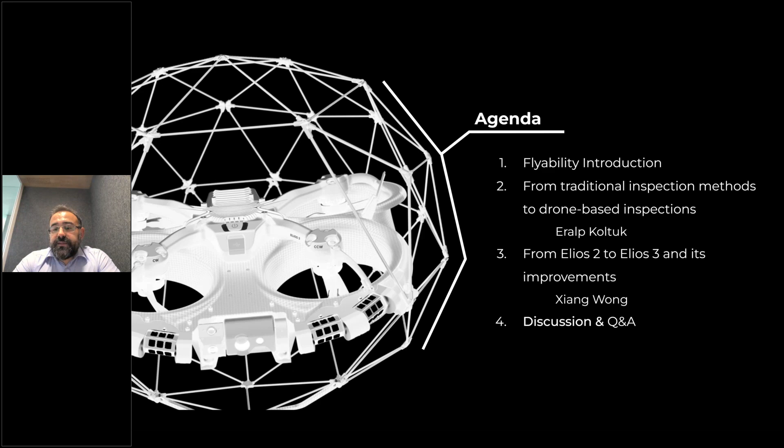So let's get started with a short introduction about Flyability. I see some familiar names here in the attendees list, so I won't delve too much into this, but this is our motto. This has been our mission since the company's establishment almost 10 years ago: no more humans doing dangerous jobs. This has really been the polar star guiding our mission and the development of our product. We have a vision of making confined space entry redundant, and really avoiding as much as possible unnecessary danger when it comes to dangerous industrial areas. We've been quite successful in that endeavor.

Here you really see the development of our products throughout time. In 2016, we launched the very first UAV solution for confined space inspections. Elios 1 was a fantastic rugged machine that has really been through thick and thin and has helped cement Flyability's reputation in the market as the go-to solution for UAV in confined space inspections. And then in 2019, Elios 2 came along, and that was a game changer in terms of ease of use and ability to operate in very complicated spaces, even for people without a lot of UAV experience.

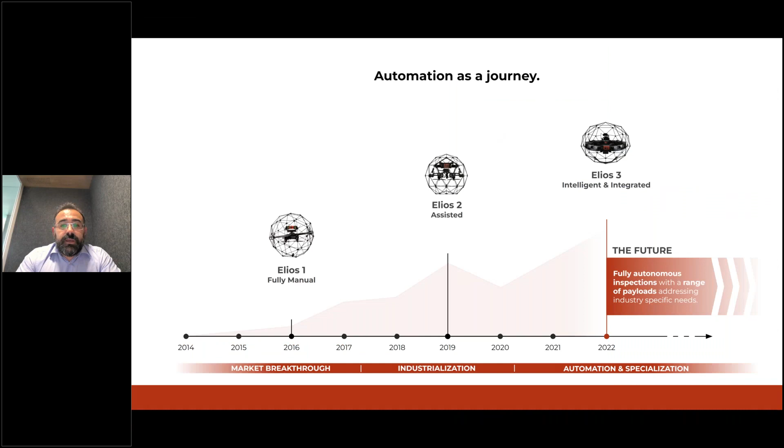And then we changed the game again with the Elios 3, which was launched last year and really became a bestseller in a matter of very few months, and has helped consolidate our reputation in the area as the best drone solution for confined spaces. It has really led to a plethora of discussions around the possibilities of integration with other payloads and the development of the drone itself in terms of autonomous capability. Perhaps this is something we'll be able to cover in the Q&A. I'm sure there will be several questions about that.

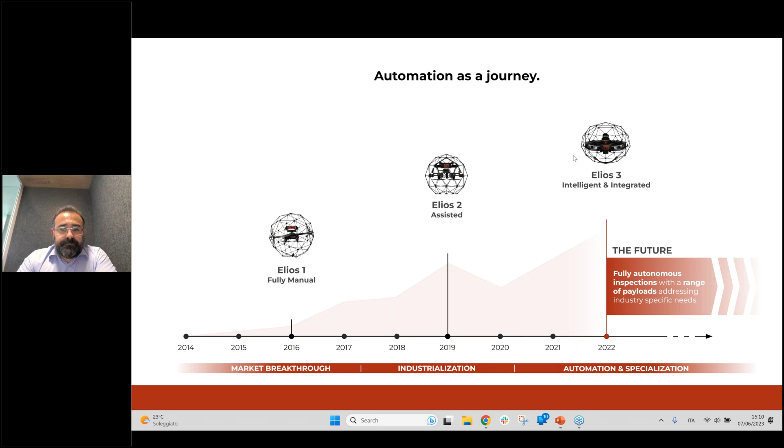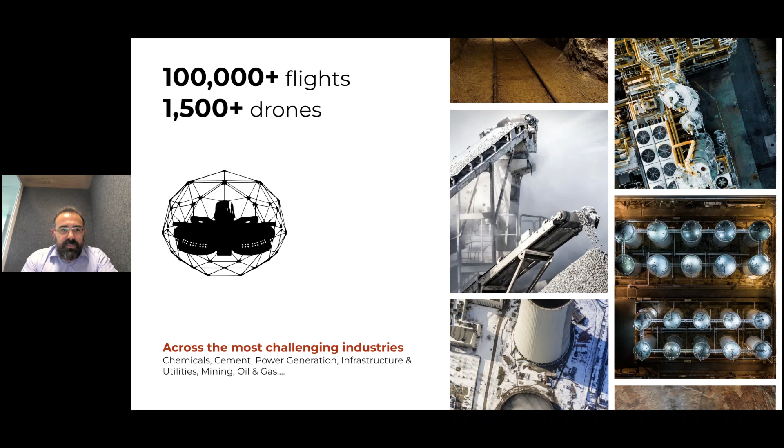This is a very quick overview of some of the most high-profile companies that we've had the pleasure and opportunity of working with during the years. Two in particular deserve a particular mention: Dow Chemical and Cargill. They both made the transition from clients to actually investors. They were so involved in and convinced by the goodness of the approach and benefits of Flyability, and respectively the Elios 2 and Elios 3, that they decided to partake in the Series B and Series C of fundraising for Flyability. So that again goes to prove our track record and our ability to deliver at scale in very large industrial organizations across multiple sectors.

And throughout our products, the three pillars in terms of value propositions - something our illustrious speakers will present to us today - have really been built across these three core elements: improving safety, reducing downtimes, and lowering cost. We'll take a look at how, through different perspectives of asset owners and inspection companies, the calculations of ROI regarding these criteria can change, but at the core they remain the key value proposition that Flyability offers through its solutions.

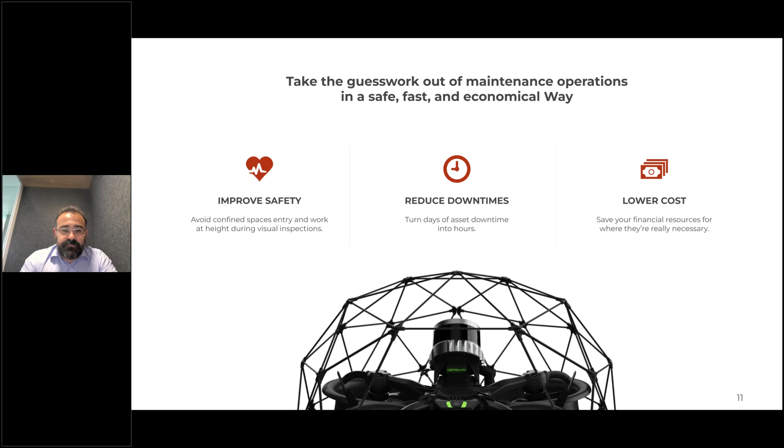Elios 3 is our latest solution. It was launched approximately a year ago - a revolutionary approach to confined space inspections. For those of you not familiar with Flyability products, the key characteristic is that we go where no drone has been before, made possible by a number of technical and high-engineering solutions, including LiDAR and a series of sensors that make it capable of flying even in areas where no GPS signal is reachable. This gives us the opportunity to explore and digitalize areas and perform close visual inspections on assets that would otherwise require very dangerous, costly, and time-consuming infrastructure like rope access or scaffolding.

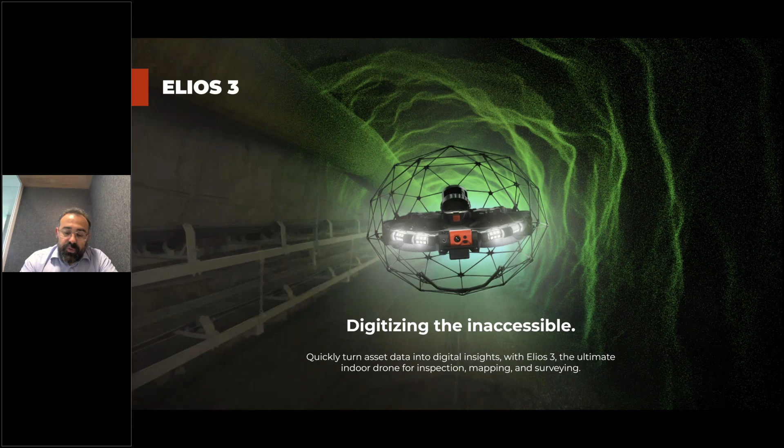Without further ado, it is my pleasure to introduce Eralp. Eralp, good afternoon, thank you for being with us today. Eralp, as I mentioned, is Inspection Chief Engineer at Tupras, one of the largest oil and gas manufacturers in Turkey, and also one of our longest-standing Flyability clients. Eralp is going to talk to us about the transition that Tupras as a company has made, going from traditional means of inspection like scaffolding and rope access to introducing solutions like the Elios 2 and Elios 3. Eralp, thank you very much for your time, and the floor is yours.

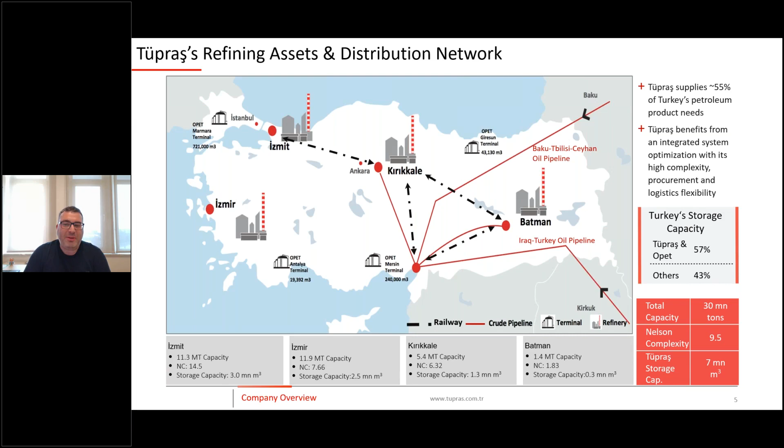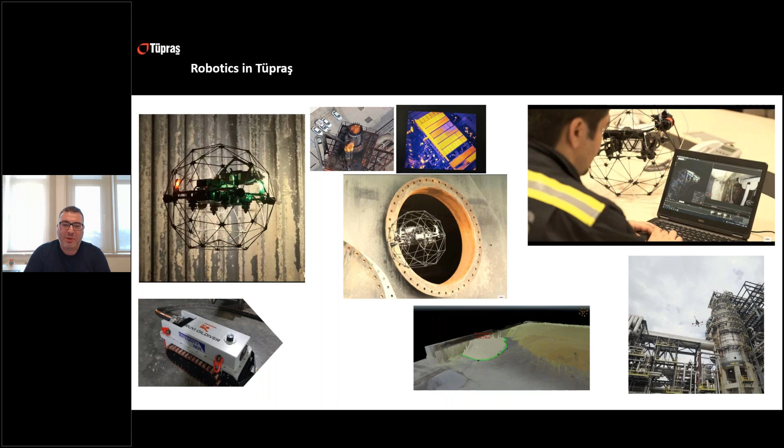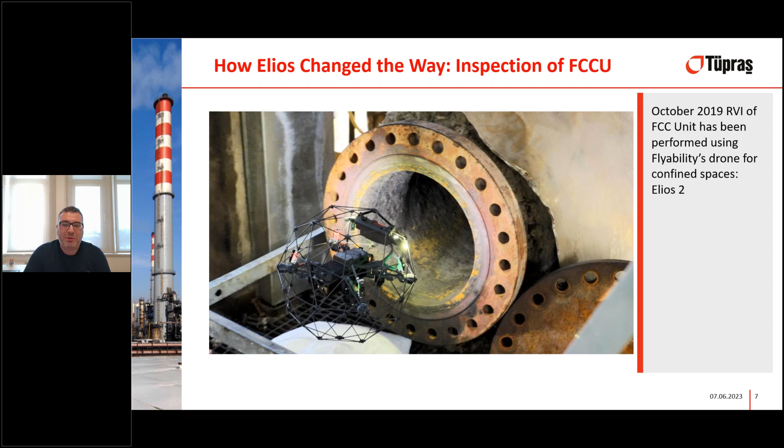So I want to start by discussing how Elios has changed the way we perform inspections. In 2019, during our planned turnaround of the FCC unit, we needed to inspect the riser section. You can see the riser section on the left, highlighted in yellow. It's a 50-meter long pipe where heavy hydrocarbons from crude oil are broken or cracked into smaller hydrocarbons. We wanted to inspect the section, including the cyclones on top, which is a very challenging task.

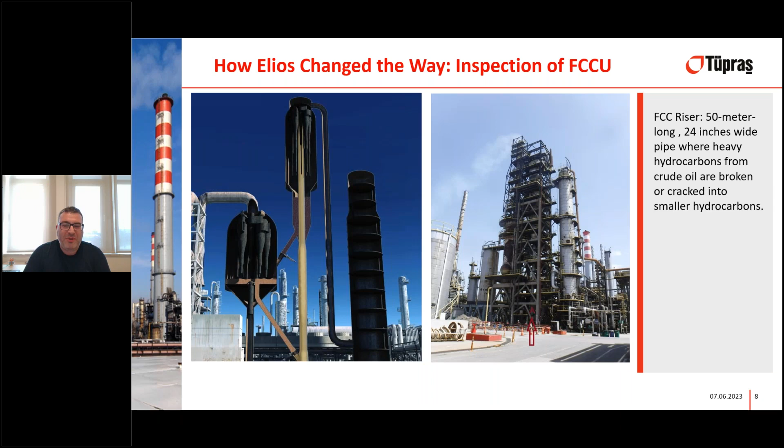Previously, this is how we used to do it. First, you needed to cut the cap of the riser section, which is 24 inches in size. Then you had to lower someone inside to perform inspections, taking many precautions to minimize risks. You can see someone with white protective clothing in this photo. Qualified rope access personnel were needed for this task, equipped with a camera and a flashlight. We mostly relied on a set of photos and verbal comments.

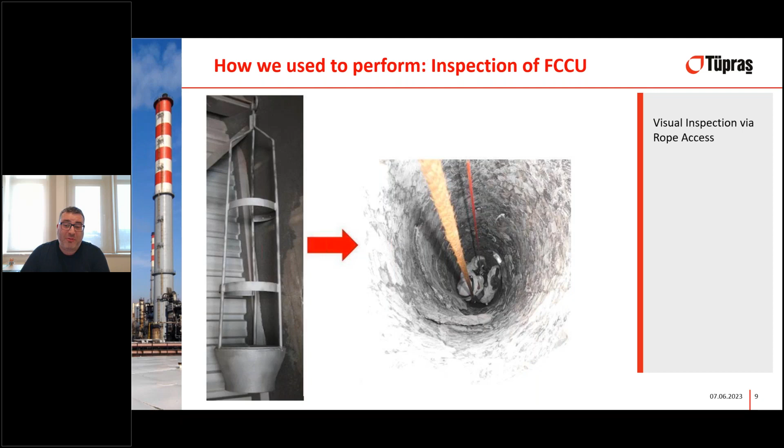Once the inspection was completed, the riser cap needed to be rewelded. As I mentioned before, it was 24 inches in size and made of 5 chrome materials, so it required post-weld heat treatment as well. If everything went well, this sequence would take no less than 2.5 days, equivalent to 170 human hours of work.

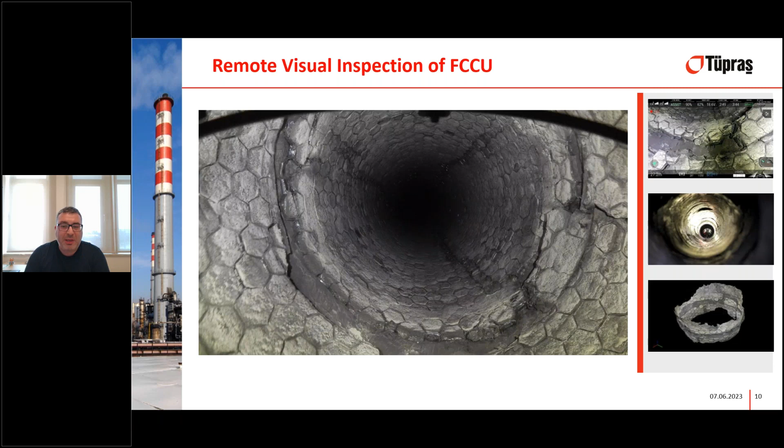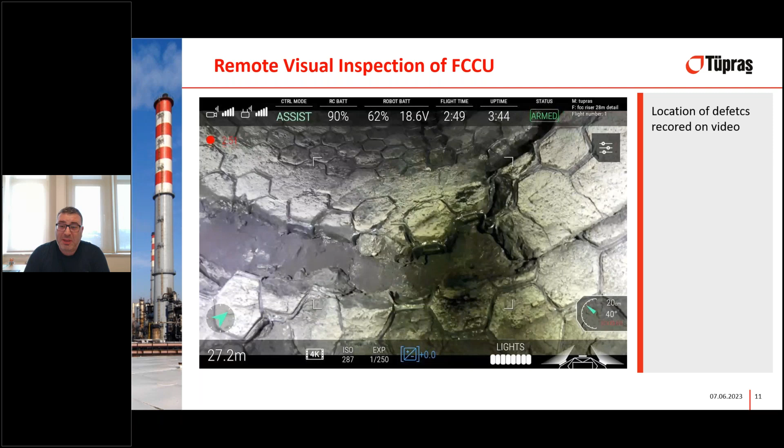Instead, we entered from the bottom flange and completed the visual inspection in several hours, including the cyclones and overhead vapor lines. The location of defects was recorded on video, allowing for detailed inspections of specific points. This gave us the opportunity to perform repeatable and comparable inspections.

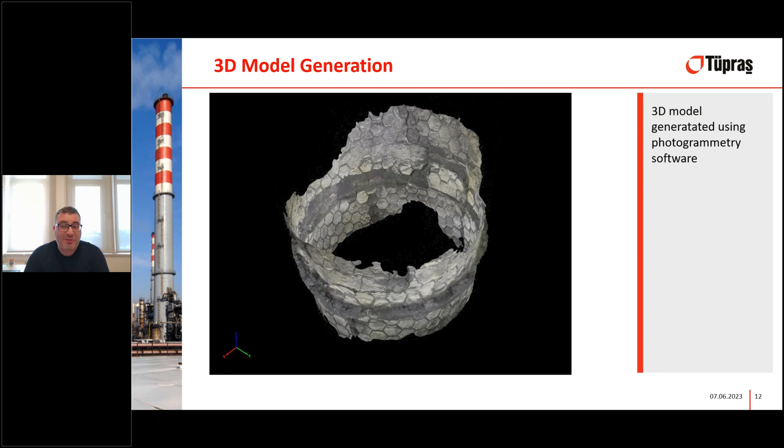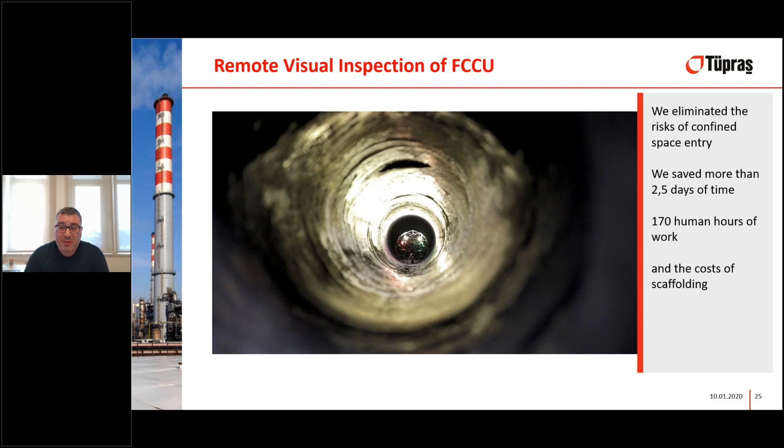Furthermore, it was possible to generate a 3D model using photogrammetry software, providing a 3-dimensional insight for further evaluation. The FCC riser inspection using the Elios drone was a success. We eliminated the risks associated with confined space inspections by not sending anyone inside. Additionally, we saved human hours and the costs of scaffolding.

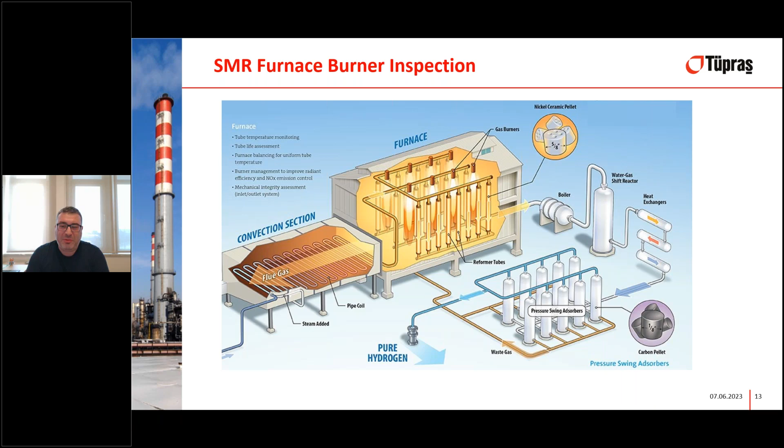Another example is the burner inspection of the reformer furnace. This is a generic illustration. As you can see, the burners are top mounted. The only way to access these burners was to install scaffolding, requiring over 1,000 cubic meters of scaffolding to be installed and removed. However, we completed this inspection in half a day. The quality of the images is very high, and the amount of detail we can see is more than satisfactory. It was another good example of a successful remote visual inspection.

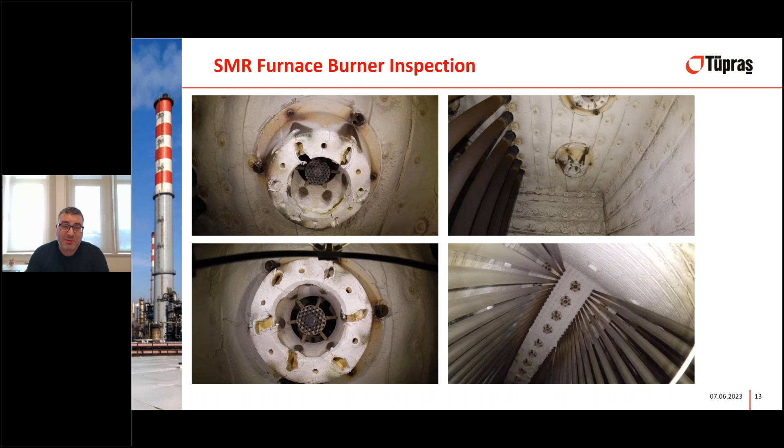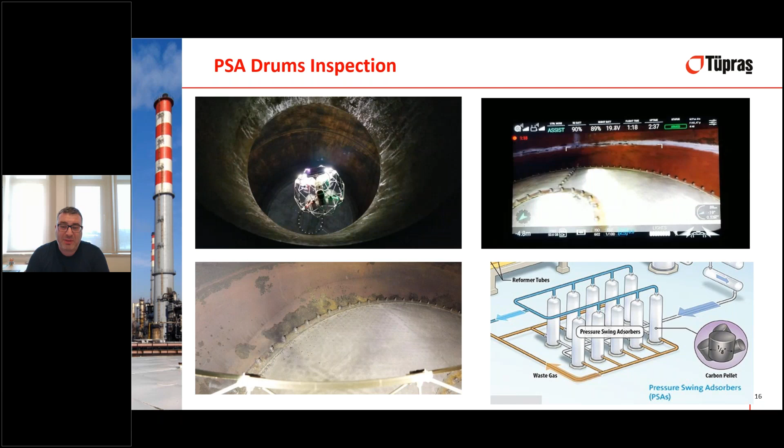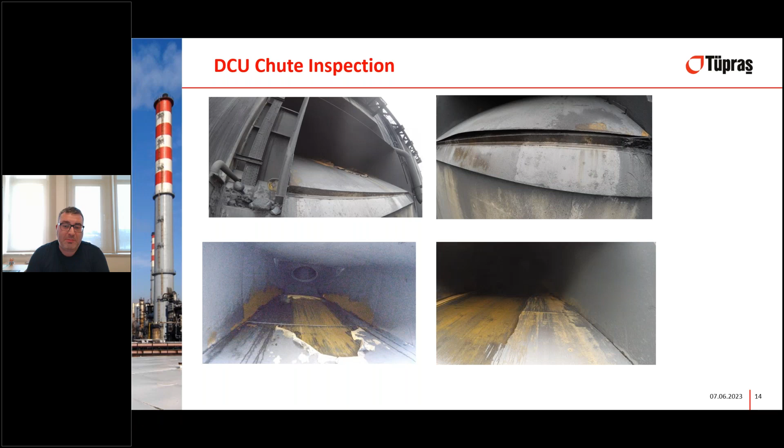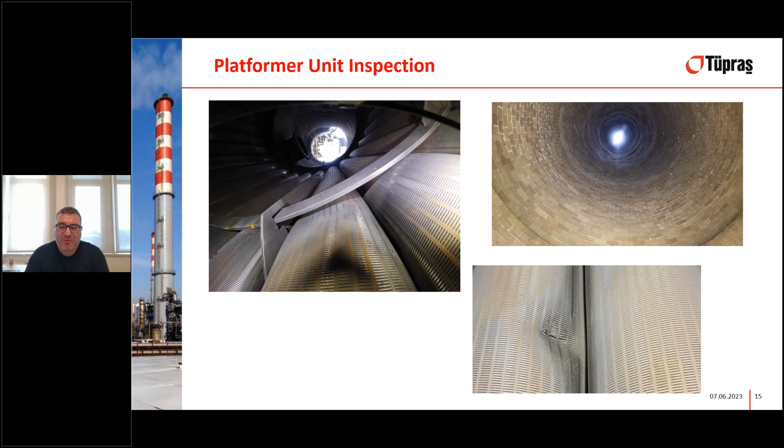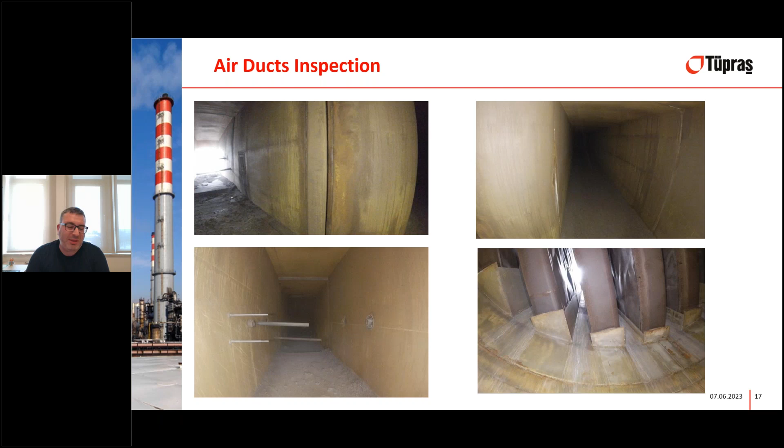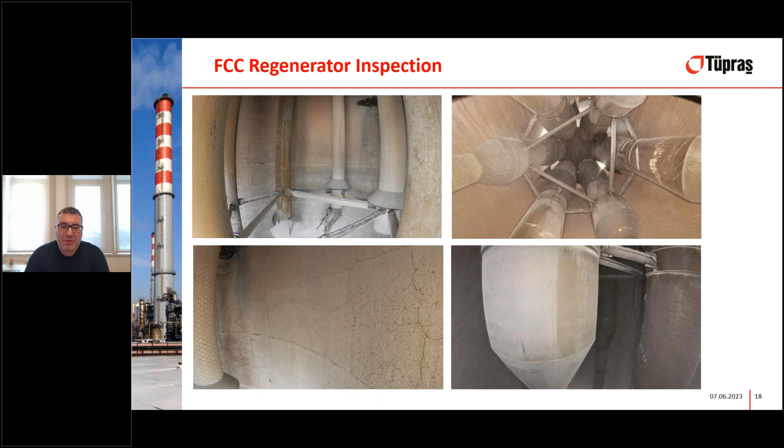So when it comes to air ducts, we normally use rope access professionals to perform inspections. However, it's quite easy with the Elios. This is the FCC regenerator, which is very dusty due to powdered catalyst. We don't need to install any scaffolding to perform this inspection.

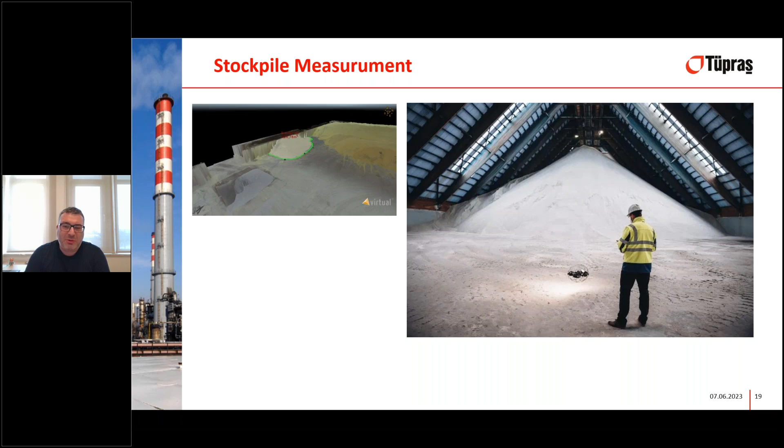And stockpile measurement, it's a new feature that is yet to be tested in Tupras. All stockpiles are normally open air, except one big deep depot where we store coke. We are considering testing this feature soon.

So I also want to mention the Flyability Inspector software, which is quite useful for generating inspection reports and recording information for certain points of interest. That is all from me. I hope I could give you an insight into how we benefit from Elios in our inspection works. Thanks for listening.

Well, indeed, that was incredibly informative. Thank you so much. I think it's quite difficult to have such a wide range of assets presented in such a succinct way. I guess perhaps one of the most important questions that I would have for you, and I take this opportunity to invite the audience to start asking questions. The panel is available on your right, so feel free to start asking questions. We'll go through them as we go along.

I guess one of the key questions I have for you as an asset owner is, what were the biggest challenges for you as an inspector? Because you don't start as a digitalization expert or an industry 4.0 expert. What were the challenges for you as an engineer, as an inspector, to convince your management to adopt this new method of doing things? As you all know, the oil and gas sector is the most conservative sector in the world, so they all want you to prove the concept before they let you go. So it was 2019 when I connected with Mark, and I want to thank him.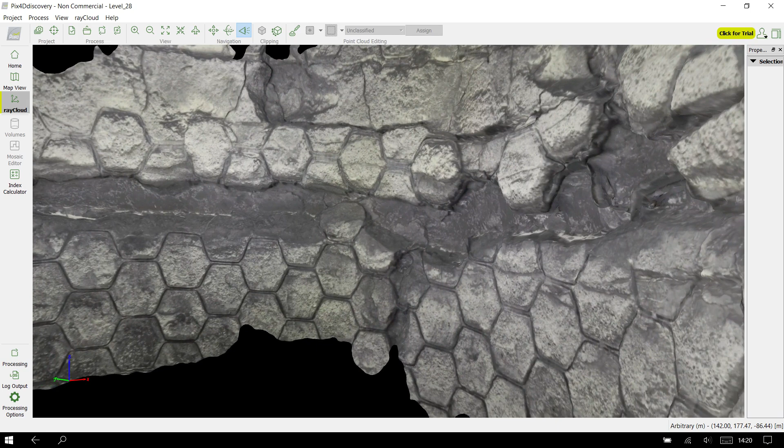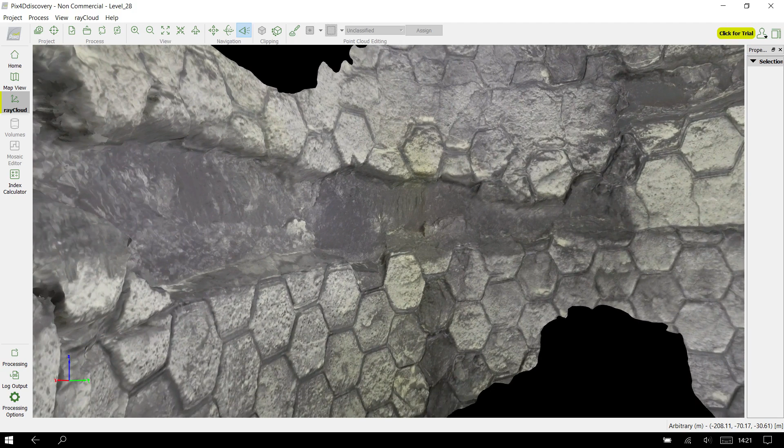This should be on your screens momentarily. Basically what you're seeing here is a 3D model, a photogrammetry model that we ran through Pix4D Mapper. This effectively has given us and the client, which in this particular case was Tupras, one of the outcomes of the proof of concept that we performed at the refinery.

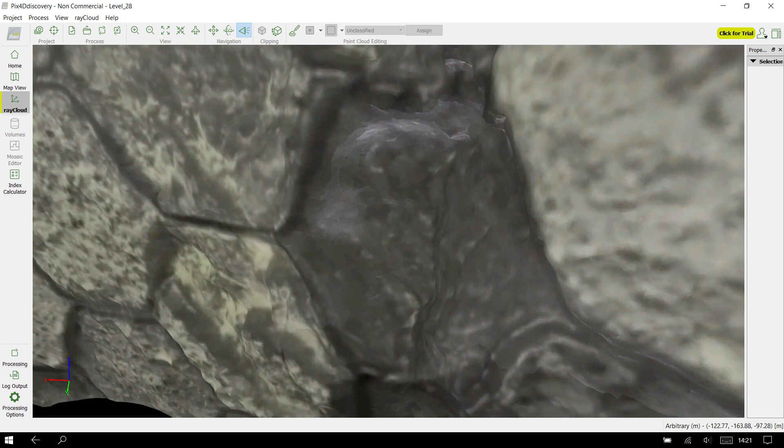It gives them the possibility to really analyze, at a centimeter or even a millimeter level of detail, the conditions inside of the FCC, categorize the defects, and quantify the amount of refractory material that was missing, in order to make an informed decision regarding the maintenance process to put in place afterwards.

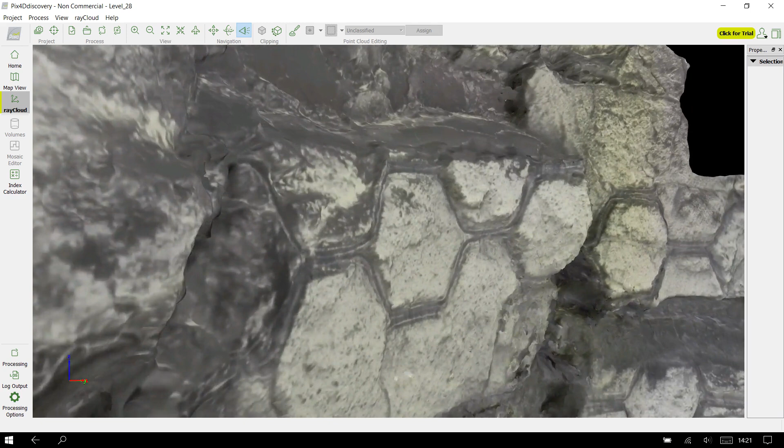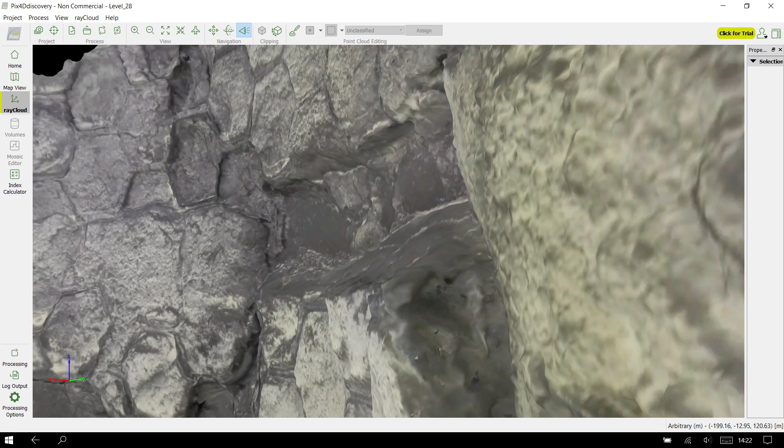So even with the Elios 2, it's not just about the visual information, but there's an additional layer of analysis that can be made in terms of digital information and better informed decisions with better actionable intelligence that come from a 10 minute inspection. Then obviously all of this is significantly improved with the introduction of the Elios 3, which mounts a LiDAR, bringing digital data to a whole new level.

That is a great segue into the next topic of discussion. Errol, once again, thank you very much for your time and contribution. Before we move on to Xian Wang, I'd like to share the first question that we have today, one of two from the poll.

The question is: what are the biggest challenges in your current role as audience? You should be able to see the questions now on your screens. We have 5 options available for the audience: resistance to innovate, lack of resources—this could be specialized personnel or simply availability of funds—unscheduled shutdowns, lack of training, and excessive and inefficient bureaucracy.

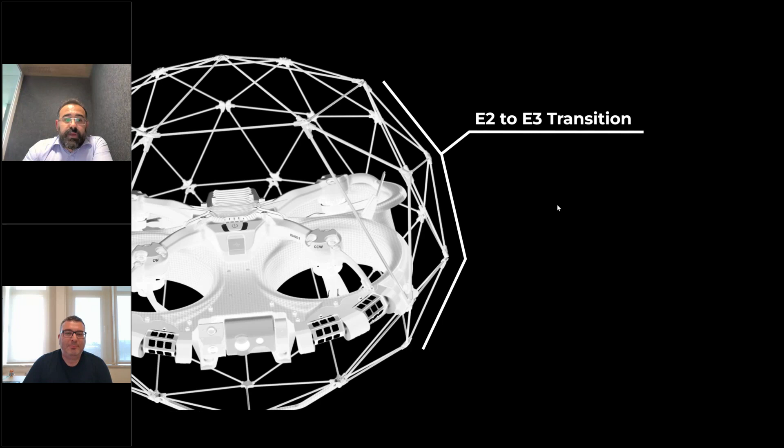Xiang, thank you very much for being with us today. You're truly one of the most experienced people in the industry, I would say, when we talk about UAVs applied to the maritime and oil and gas industry and anything in the middle. I think you're also one of the very few people who has experienced every drone, probably from the Gimball, which was really sort of the father of Elios 1, all the way to the Elios 3. Again, we're very lucky to have you here, and I'll let you share your experience with the audience.

Thank you very much. Thank you, Junior, for the introduction, that's very humbling. And thank you for the opportunity for Flyability to give me this chance to speak more about this amazing technology and the benefit that comes with it. So, if I may take control. It's all yours, son. Okie dokie.

So good afternoon again. I'll briefly introduce myself. I'll briefly introduce the company I work for, Texo. I'll show a case study, and then I'll talk about other further applications.

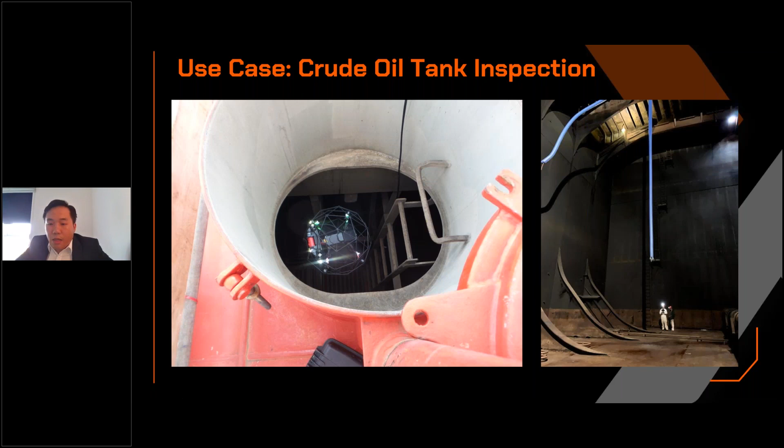On the left, you can see what the Elios is like against the manway. The benefit of the Elios drone is you can fly into places where you don't have to put people inside. I believe Errol has already given you plenty of examples of the quality of images and level of detail you can get out of it.

Here is an example of the level of detail you can get inside an oil tank. Of course, this doesn't remove the need for ship owners, tanker owners, and oil operators to prepare a tank so you can provide meaningful data. However, oil and gas is such a cost-sensitive, high pressure, intensive environment that sometimes people will want information before everything is completely cleaned out. So we work around it, but we can still give meaningful data without putting people inside confined spaces.

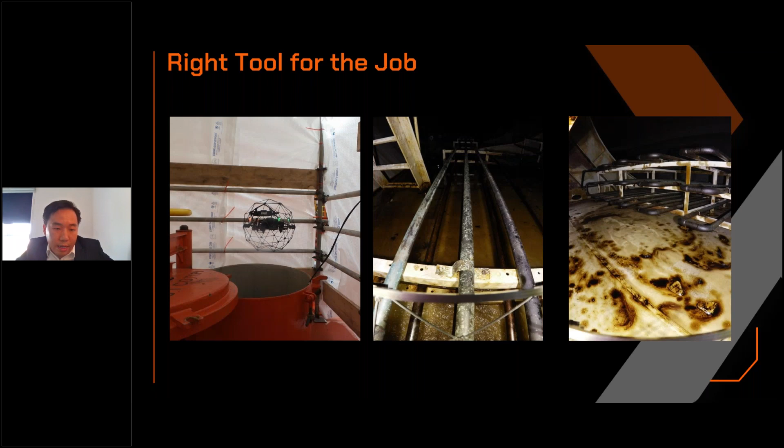Now I'll give you a brief context of the benefits of using the Elios drones: speed, safety, savings. Speed, of course, you can save from days to hours depending on how many tanks you're looking at. A typical tanker might have a dozen tanks, and you may be able to complete inspection in a matter of days compared to weeks.

Safety, you collect data remotely without having to put people in harm's way. And the savings, in terms of sending a lot of people, depends on which part of the region you're in. Sometimes people are happy to send a lot of people because labor is cheap, whereas in other locations you may not be able to afford that. Or if your asset is in remote places where POB is a premium, the Elios will be a great answer.

Now, another residual value I haven't mentioned: in some cases you might have to put up scaffolding to carry out a full inspection. Scaffolding is not only costly and time-consuming, but the act of taking it in and out of confined spaces can be quite damaging. So if you have a coated tank, removing the scaffolding after your work could cause more damage, which you wouldn't want before returning your asset back into service.

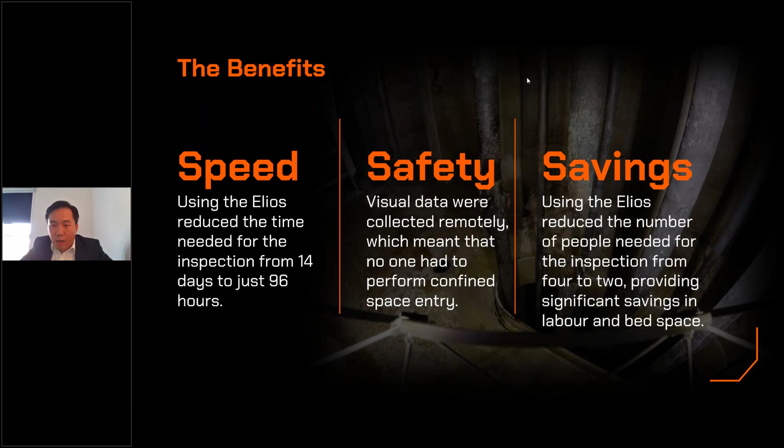That's another thing to bear in mind when considering adopting new technologies versus traditional means of doing your maintenance and inspections. Now I'm going to hand it back to the organizer to give you a very quick video of what the Elios 3 looks like in these spaces.

So Paula, would you like to take control? Or Junior? Yeah, I'll be happy to share the video. Just remember to reactivate your microphone as soon as you see the video so you can comment on it. Video is coming right up.

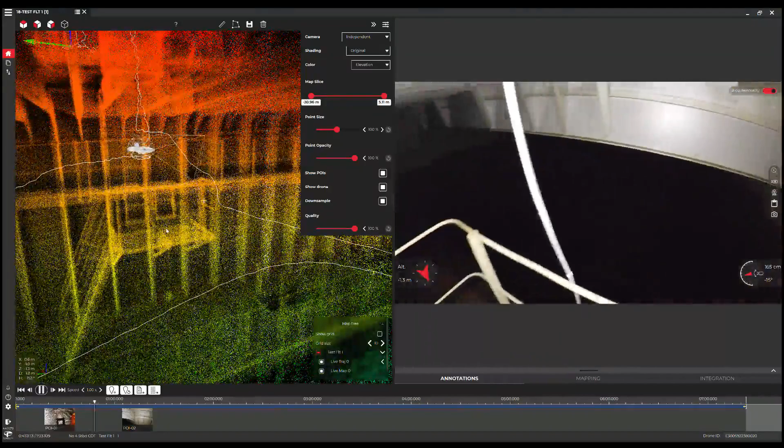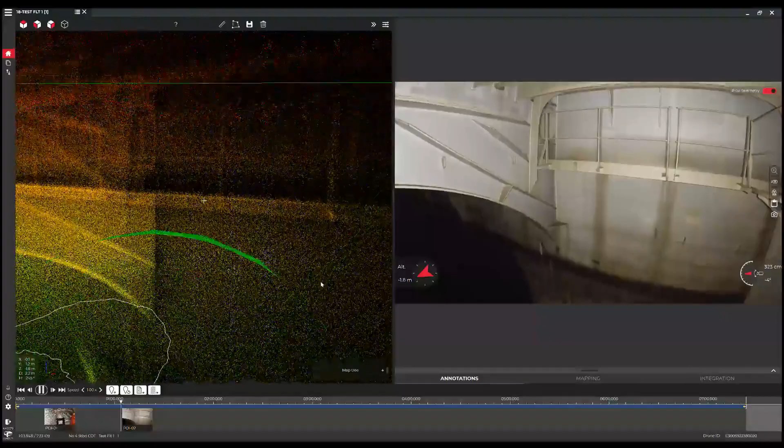Thank you. Now what you can see here is Elios 3 flying inside a crude oil tank with no man entry and no lighting. This is one of the first ones we did, so you can immediately see the scans being built up on your left-hand screen in terms of the spaces.

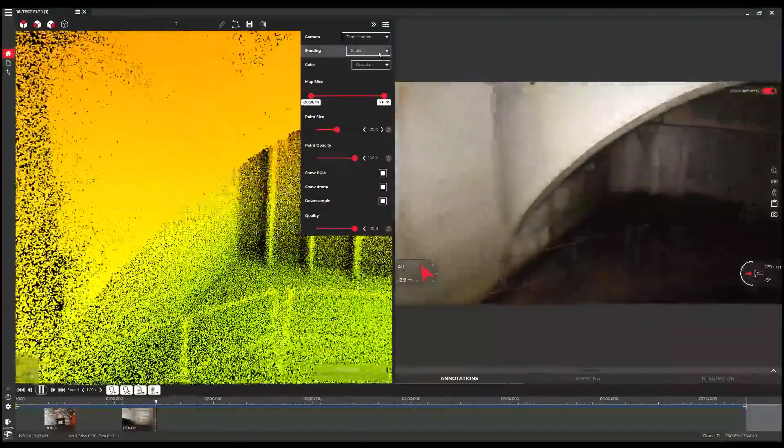What I wanted to highlight here is, imagine you're inside an environment where all the structures look almost the same, and you get bodies of inspectors or classification societies or surveyors who want to inspect this kind of tank remotely. So how do you give them confidence? As Errol rightly said, oil and gas is one of the most conservative industries out there. People want you to prove the point before they let you go ahead and do the rest of the activities.

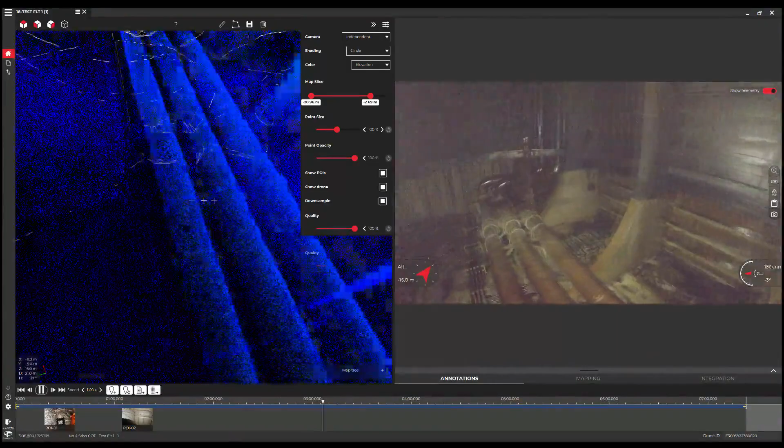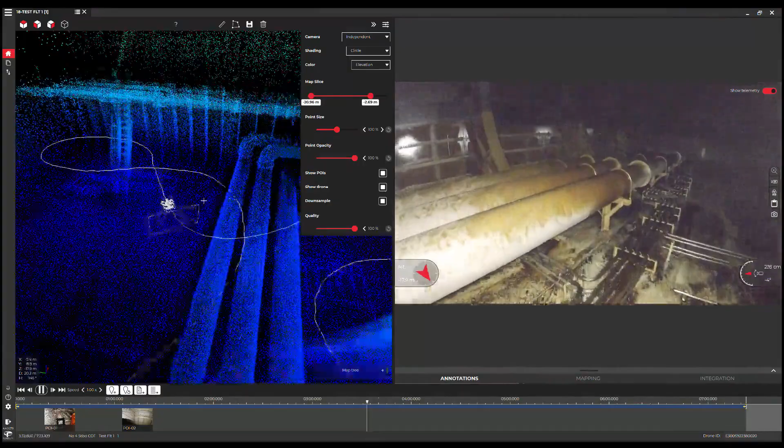Here we can see that not only can you navigate freely, but you can also pinpoint immediately where this drone has been, so you can confidently say this inspection's been done on this bulkhead, bulkhead number one, two, three, four, five is okay, or the underlying bulk is fine, or this particular hotspot is covered. Then you'll be able to remotely say that this work scope is completed.

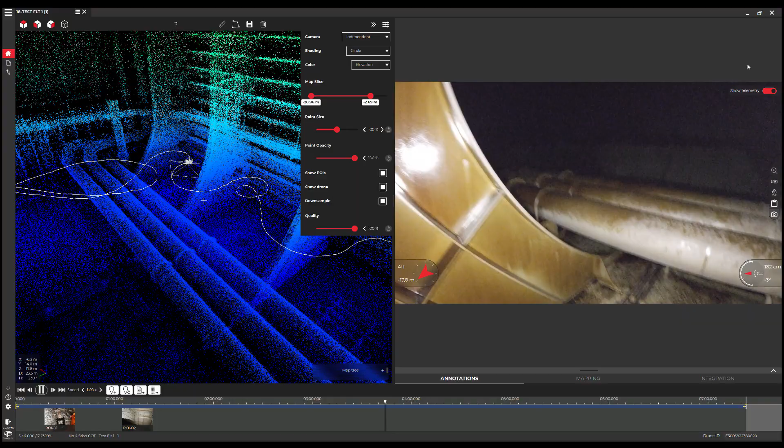Okay, thank you, let me move on to the next one. If I may just intercept - thank you so much for sharing this video, which again is incredible. Addressing one of the questions we've already received, something Adolf also touched upon: can you tell us how long does it take to go from flying, collecting the data, to coming up with the model we just saw?

That depends, but in this one I'm going to share my screen again. Do I have control? Back to you.

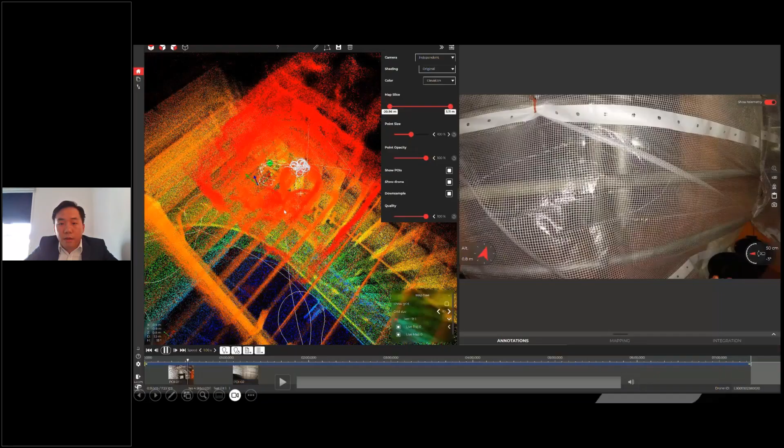The model you saw just now is instantaneous almost. So you do one flight and you'll be able to see a sparse cloud of the flight that is taken. That in itself will give you the spatial awareness. You'll be able to see your area of coverage, your level of confidence in terms of data you get. However, if you want to take this further, you could do 3 or 4 more flights for a tank of this size, to cover shadow areas, for example underneath a walkway, or behind a girder, or behind the pipeline that you can see here.

Each flight takes about 8 minutes. And then you take this data.

The beauty of this software that Flyability and the good software developers have done is they make it easier for us to export it into a separate software, any photogrammetry software or any LiDAR processing software, so you can put all the data together. You can take the data from the 4 flights and combine them into this one beautiful model. And I say beautiful because I just love tanks.

One of the benefits is you can use this to interrogate a space where, for example, there's a defect but the area is dangerous, or there was a leak involved in one of the pipes or valves. The operators will face challenges in planning remedial action. So what Elios can do is you can go in there, not only scope it out, but also build a model that allows your engineers to plan and design a remedial scope, knowing where to cut, how to fabricate, how to install it, without having to send people inside the tank or mobilize multiple teams. So that's one of the benefits.

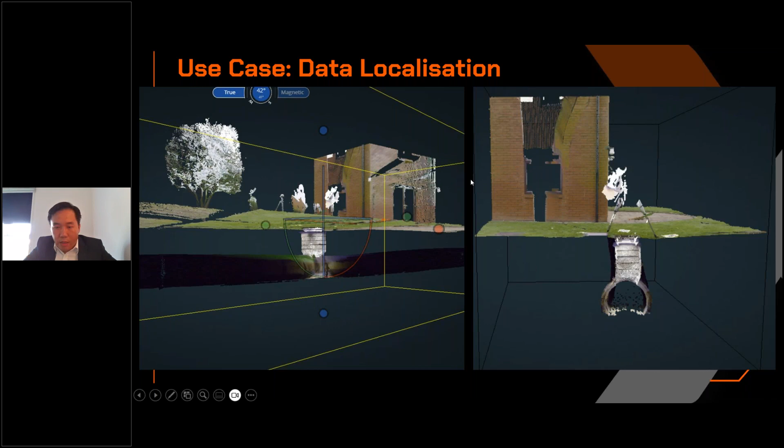So for us as service providers, we combine our skill sets in photogrammetry, land surveying, and also the ability to fly drones underneath in confined spaces, providing this kind of data to help you make good decisions on where to excavate and where to pave your roads.

Now, to summarize, what does it mean for confined spaces in terms of Elios 3? In my opinion, it gives better confidence than the Elios 2 in terms of coverage. It definitely gives people more confidence in eliminating the need for man entry, especially in complex spaces. So for guys from shipping industries, you probably know semi-submersibles, ballast tanks - they're very, very complex.

Depending on what stage of the asset you want to look at - it could be just after fabrication, or after a long campaign, or a shutdown, or even life extension - without sending people down there, you can use the Elios 3 to navigate those very complex spaces. Imagine trying to figure out integrity inside a maze of tanks. So I think the Elios 3 is really good for that.

The third point is better visibility for remedial work. If you've got a problem in your plant or in your tanks and you don't want to send people inside, it's an excellent tool to give you better visibility and also for planning.

The final output is also quite useful, and you can export it for engineering studies. The scan model can be merged with other existing 3D models. A lot of places will have legacy laser scans, and you can use the Elios 3 data output to merge with them to give you a more complete model.

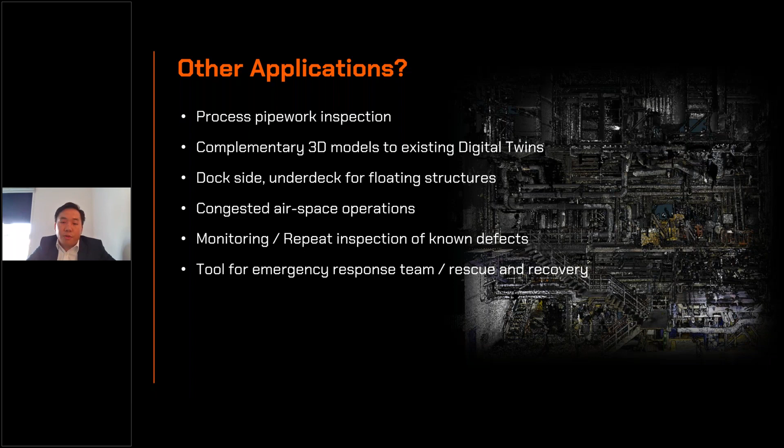The last two applications are monitoring or repeat inspection, as most people will use it for, and also a tool for emergency response. God forbid there's an incident or a missing person - you don't want to put people in harm's way into those spaces, but you want to quickly identify areas where the people could have been. Again, Elios 3 could be a very useful tool for emergency response. So that's it for me.

Shyam, thank you very much for this very extensive overview of the capabilities of the Elios 3 system.

I wanted to share - it's important to talk about digitalization and the benefits in terms of cost and time reduction, but obviously health and safety, especially in such a dangerous industry, should be front and center. That's specifically why I found very interesting the point you mentioned regarding using the thermal camera for subject identification. I wanted to share this very short video that gives an idea of what the thermal capabilities of the Elios drone look like.

Video should be coming up shortly.

Again, when we talk about confined space assets and accidents and access, very often we have these tragedies where the first person goes in and falls sick, the second one goes in, and then the third one, and very soon we're talking about a very large death count. So the ability of the drone to deploy this thermal camera...

Have you ever come across situations, Shyam, in which this was actually something you wish you had with you, or do you see situations particularly offshore where this could be of service?

I think you're on mute. Can you hear me now, Junior?

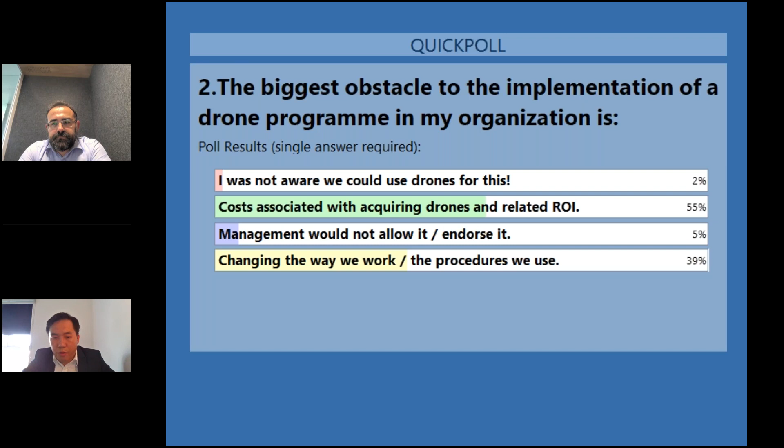I suppose I can only speak for an enterprise like Texo, where we have other skill sets and capabilities that are able to take advantage of the Elios 3. We're not just there to use the Elios 3 only and try to maximize it. You need to use it with other skills like surveying, land surveying, inspections, or even RIT.

That's one of the things I'm working on right now. In the shipping industry, they have this thing called remote inspection technique, which is becoming more and more popular, and more people in the industry are receptive to it. Remote inspection technique involves ROVs, crawlers, and in this case, of course, drones. So you want a crew of people who are skilled in operating these robots, including the Elios 3, to be able to give your operators or the clients the combined ROI.

So I think there's no simple answer per se, but if you know how to use it with the other things you have to solve the problem, the problem tends not to be straightforward in oil and gas. It's always a complex one. So you want to bring together other tools you have with the guys who know how to use it to get the ROI.

I think, maybe I'm generalizing here, but I suppose a lot of people who face resistance are basically not drone operators or specialists themselves. They're probably just like, let's buy one, but they don't know how to maintain it, they don't know how to plan the scope, they don't know how to use the data. So it becomes a very expensive paperweight on your shelf. I wouldn't be surprised there are a few out there who are like that.

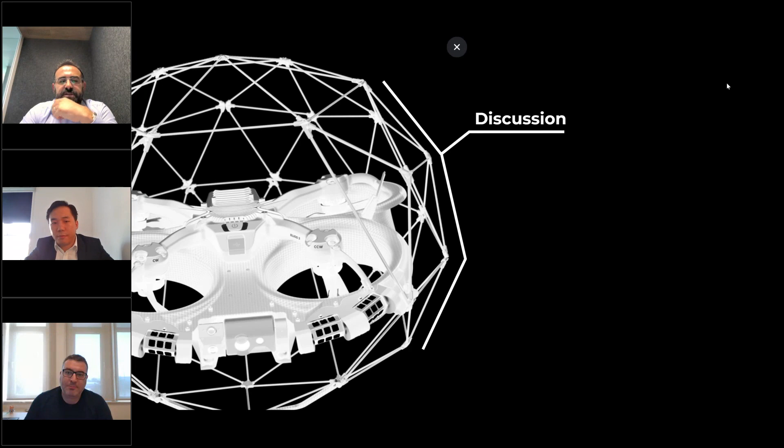I'd like to bring back Errol into the conversation. Errol, perhaps you can join us for this final session, because there's actually a question that I really would like to tackle with the both of you.

It goes back to this sort of 39% of people saying it's about the procedures and changing the way it works. Throughout my time at Flyability, one of the constant objections we keep getting, no matter how much education material, webinars, or case studies we publish, is ATEX and intrinsically safe. I'd like to hear from Errol first, and then from Xiang Wang. Errol, what kind of procedures, what kind of measures, what kind of risk management tools have you put in place to be able to use this in ATEX areas?

You obviously showed us that in some situations, in some particular conditions, you have used nitrogen purging. What else is out there, and what can you say to the topic of, you know, this is a no-go area and we will never use drones because they're not intrinsically safe?

This was our number one concern before adopting Elios, I must say. In short, you need to have a hot work permit in order to use drones in a confined space. But sometimes the benefits you get from drones are so much that the health and safety guys try to, let's say, bend the rules by making constant gas measurements, and they are trying to help you actually.

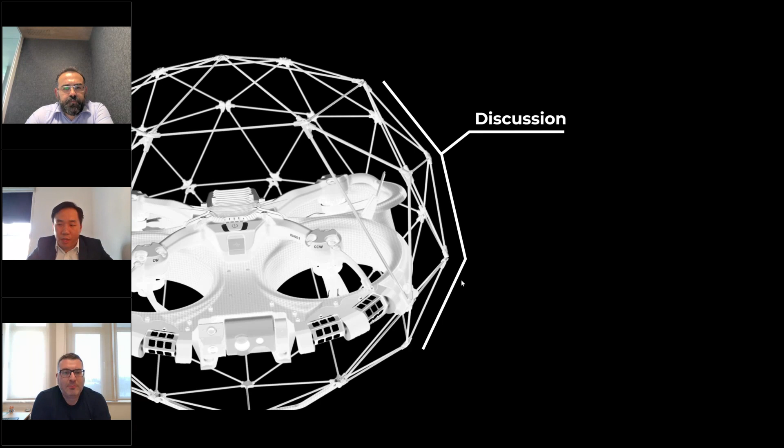So it does take a bigger team to put yourself in a position where a classification society is saying, show us what you can do, prove it, okay go ahead and do it. The other caveat is that even within the same classification society, surveyors may have different opinions. If you have a surveyor in Aberdeen saying okay, but in Singapore they might want to witness it first before they let you do the job. But if you're able to get the first classification society approved, they're more or less the same for the others, they're all under IACS. So if you get one approved, the chances are the second and third will be approved fairly easily, we hope.

Thank you, Seung-Won. And for the record, Flyability and our drones have already been approved by several naval registries, including RINA, Registro Italiano Navale, Bureau Veritas, and others. But indeed, thank you for the answer.

I feel very privileged to have you both here, because it's one of the very few Flyability webinars where we actually have the opportunity to combine points of view on one of the most heated debates we have, this Manichaean view of insourcing versus outsourcing. We have an asset owner like Tupras that has decided to internalize the competencies and skills for drone inspections, and we have one of the prime examples of an inspection company providing these services in outsourcing.

Errol, the final question I have for you is, knowing everything you know now about how to run an internal drone program, if you could go back in time, what would you do differently? Or put another way, what advice do you have for other asset owners thinking about deploying a drone program internally?